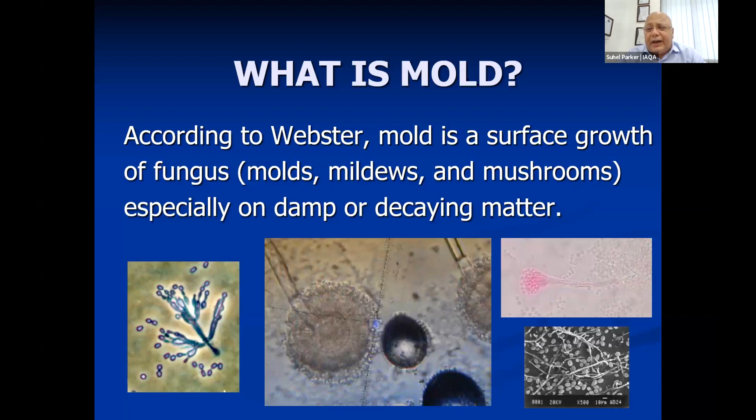Mold is nothing but fungus, and mushrooms are something like mold. It is a mold. And when you see buildings, you see those black and green growths in wall corners, on grills. That is all mold. And they do have consequences. A lot of times they're visible to us, but we are so used to it, we don't react, don't take action. The most common types of fungi are generally not hazardous, and they're not hazardous to everybody. But a good percentage of people do get affected.

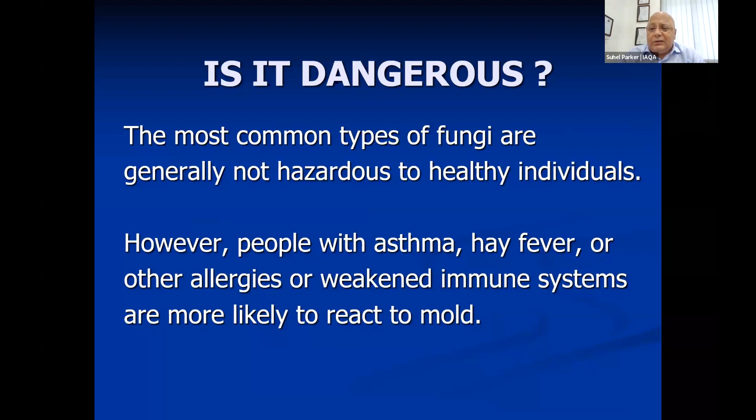A lot of people have asthma, hay fever. You might have noticed a lot of people, when they enter an air-conditioned building or an office, their eyes immediately start watering, they start sneezing, sniffing, and the guy next to him is fine. Some are more susceptible than others, but it does affect a lot of people. You must have seen this scenario in many offices. One person is sitting with a sweater and sniffing all the time, the other sitting comfortably in the same environment. The most common symptoms are running nose, eye irritation, coughing, congestion, and it aggravates the symptoms of people who have asthma.

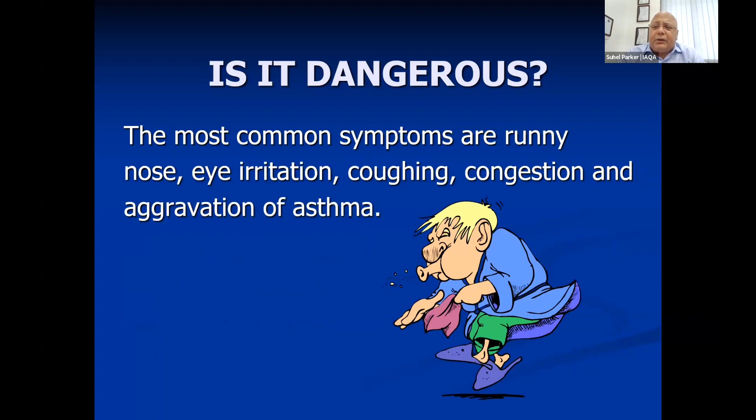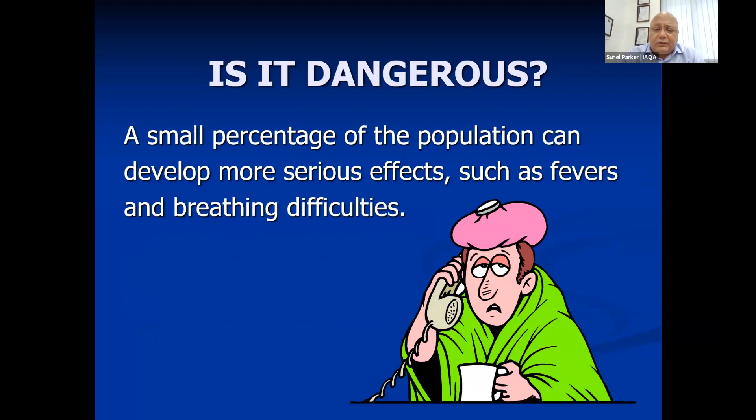A good percentage of Indians today have asthma. So you're talking about a good percentage of the population in a building. And if it's not affecting you today, it might tomorrow. So you need to take note. A small percent of the population can develop more serious effects, such as fever and breathing difficulties. Even though mold affects people differently, as I said earlier, it's not affecting all, but it will. Even where your symptoms are not so prominent, the system is fighting it, but it's there.

But is mold necessary? You've got to understand, in the earth environment, mold helps break down and decompose materials. We always talk about materials being decomposable, and mold is a necessity. You can't say there'll be zero mold anywhere, but it does affect us when, in an indoor environment, it's in a high concentration, and a lot of people get affected. So we always talk about controlling mold, not eliminating it. If there was no mold, there would be no life on Earth. Life would have ended a long time ago. It's a cycle of things. Things are born, they decompose, and they are reborn, and mold really plays a big part in that.

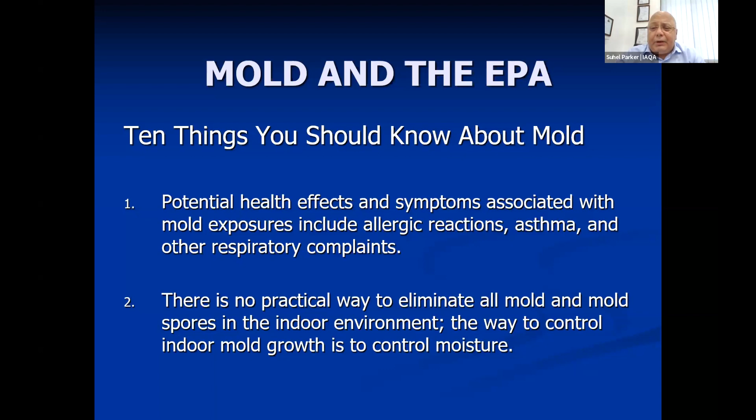What are the potential health effects? Well, you can have allergies, reactions, asthma. People have a lot of problems. And if you talk to a pulmonary doctor, there are other respiratory issues and complaints that come through mold, especially with younger children below 5 and senior people, especially in homes. It's a big issue. Practical ways to control or reduce these spores, which are prominent in the air and help in spreading mold, is by controlling moisture. And we just heard Nitin talking about the moisture being maintained in his hotel room at 80%.

10 things you need to know about mold. If mold is a problem in your home or school, clean up the mold. First thing, if you see it visually, get it cleaned. Use a sanitizer or disinfectant to clean that wall surface. Second thing, you have to eliminate the source of the problem. Generally, the source is condensation or water leakage taking place in that environment. Find the source and you can fix the problem.

Reduce humidity. As we spoke, it should be 30 to 60%. I was in one of the most premium houses in India, and the humidity there was 80% with the temperature at 20 degrees. This means there's definitely going to be condensation. And condensation means you're going to have moisture and growth of mold.

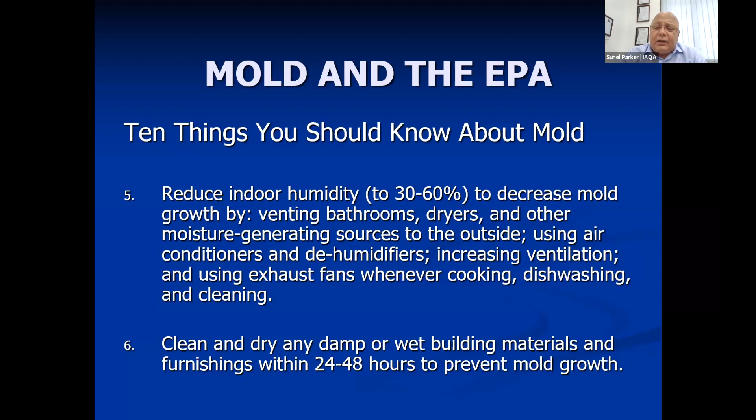All damp areas, wet building areas, even furnishings which are wet; mold grows on wood, grows on more surfaces. So you need to keep surfaces dry. That means if you see condensation happening, take action immediately. Then you can clean hard surfaces. There are various materials available to clean and absorbent materials to dry surfaces. We should get them, put them into action, prevent condensation.

If you go to hotels, quite often you have those sliding doors, and if you see a vent right across, you'll see a lot of mold growth because hot air is hitting that vent, which is generating cold air, and you'll see definite mold signs, black dots on the place. It's visual. You can see it visually. We take air samples on an agar plate to see how many mold samples are there, how many colony forming units are there. But in most cases, you don't even need to do that. Whenever I walk into a mill, I can see it visually, and we choose to ignore it.

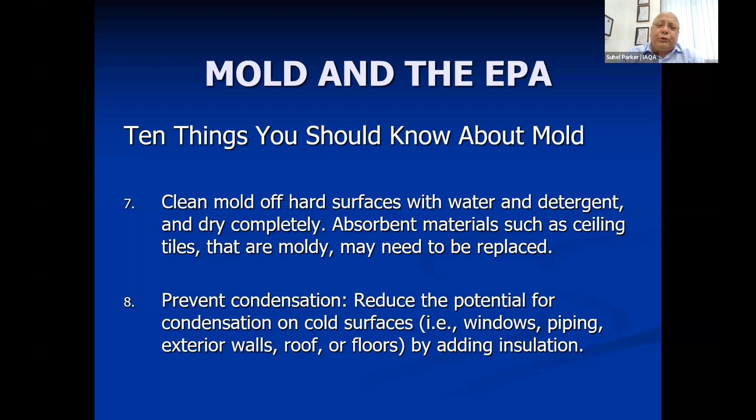10 things you should. Then we have carpets. If you have a very humid, moist area, avoid carpets. Carpets hold moisture. Hard floors are easier to dry. So in a city like Mumbai or Goa, carpets can definitely be avoided. And mold is such a fast growing, they grow in hours. They can grow on wood, paper, carpets,

specifically when you have flooding taking place, which is a major problem. So say if your bathroom overflowed, or if you had a fire and the fire department has sprayed water into your building, drying the building becomes a major issue because as the room dries, the walls start releasing more and more water. The moisture is absorbed in your building structure. So that leads to a lot of mold growth. And once that happens, getting mold out of a building which is already wet is one of the most difficult challenges.

Where did it come from? What does mold need to grow? As you said, moisture, temperature. Temperature, you're talking about ideal comfort temperature you need to grow a mushroom, say around 18 to 24 degrees. And that's what we have in our indoor environment. So the temperature is anyway ideal. We maintain that, but we can control the moisture and its source.

Food source. What is a food source? Food source is all the particulate matter, dust, little debris which generates within a building and which has landed up in the ducts and other locations; they form the food source for mold growth. So you cut the food source, control the moisture, you can control the mold. Once you know that's a life cycle, instead of using a lot of chemicals to just reduce its content for a short while, you've got to attack it at the source. Stop the life cycle of growth and control it.

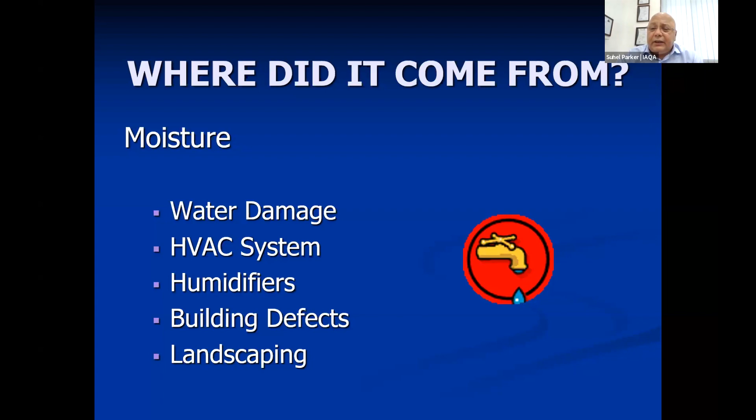There are building defects, pipe leakages in old buildings. Intake is next to a fountain. Blocked vents. Very often, when you block vents, you tend to create condensation. I've seen people feeling cold and putting a piece of paper or plastic and blocking a vent. Faulty mechanical equipment. If your coils are clogged and your drip trays are full, the capacity of the coil to remove moisture from the system is a problem. So your equipment, lack of cooling system.

Generally, an air conditioning system does reduce humidity. And if that cooling system is not functioning properly, it lets a lot of moisture come into the buildings. And the contaminated coils are those. In fact, when you talk about coils and filters, if you maintain them clean, you not only get benefits of low moisture and controlled mold growth, but you will get energy efficiency also. I've been told just by this, you can get better efficiency by 15%.

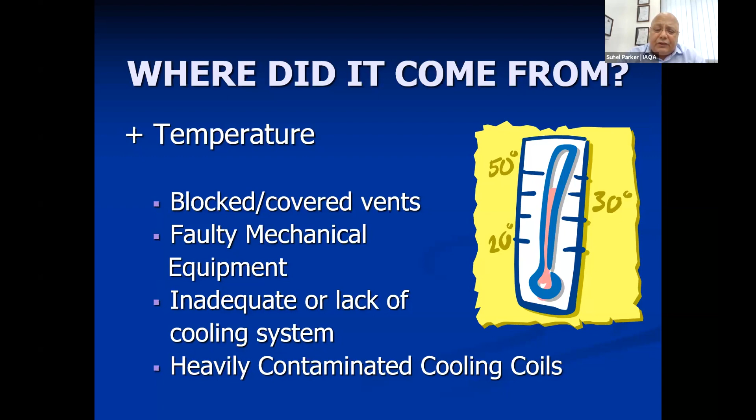Food source: all your drywalls, ceiling tiles, building materials, dust, dirt, debris. If you can control these elements coming into your building. One very common way dust and dirt comes in is through the shoes when people enter an air conditioned building. A common practice: if you just put about 10 meters of carpet before entering a building, it will catch most of the dirt and dust from your shoes.

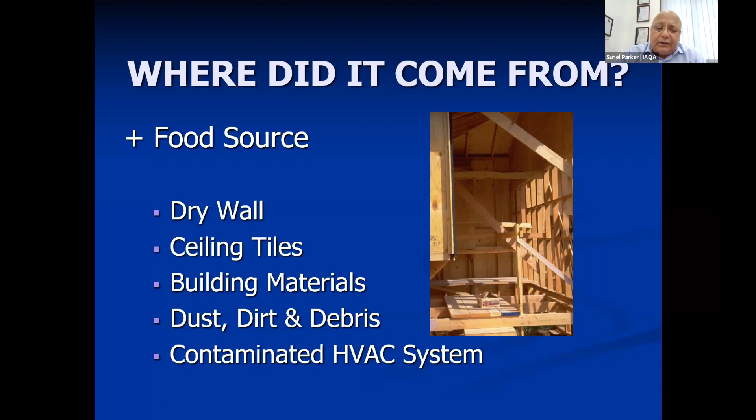These are small things which are very practical that can be done. Then there are double door systems which you can have. Then a lot of renovation takes place in buildings on and off, and that happens with the air conditioning system on. Where do you think all the dirt and debris is going? It is going into your HVAC system and all over the building. And generally, when you're cleaning, your vacuum cleaner is throwing the finer particles up into the air again. And that's why you get a higher PM1 and PM2.5, which Nitin was talking about.

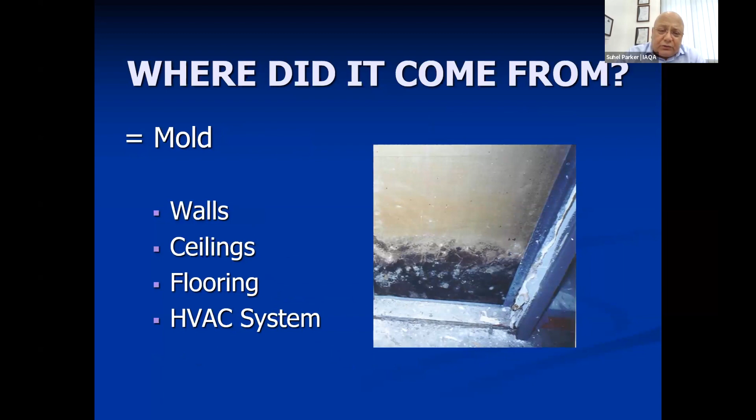This is a typical picture. You must have seen this scenario in many places, especially in the monsoon time, in most houses and in office buildings, where you find corners which have gone black and green like this on ceilings. They should be looked at immediately. It's not practical to remove all of it, but controlling it is important. The key word is controlled moisture. To have moisture control and monitoring humidity in the office is a step ahead.

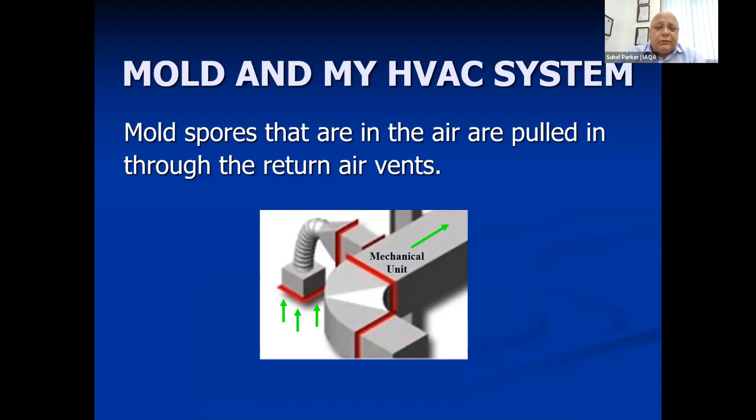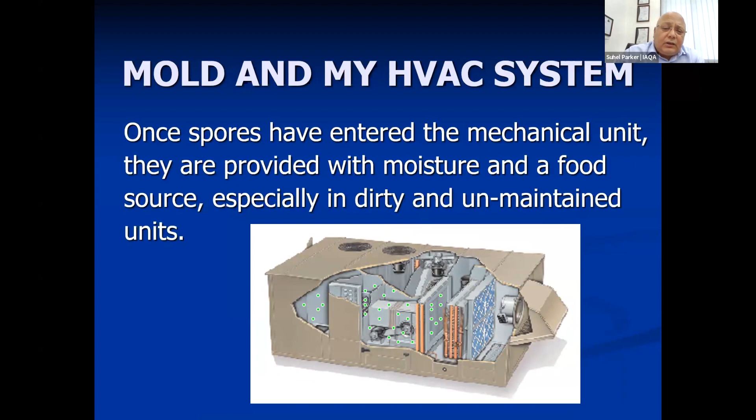Now, the air conditioning system performs a magnifying effect in the lungs of the building. It takes its spores and spreads it right across the building, and so the growth multiplies. It's like the seed for more growth. So one infected area can contaminate the entire building through the HVAC system. Mold spores that are in the air are pulled in through the return, through our coils, through our filters, where they multiply further. As I said, they grow in hours, and they are spread right across. There's a lot of food source. Dirty ducts have the food that increases the cycle of growth of multiplication.

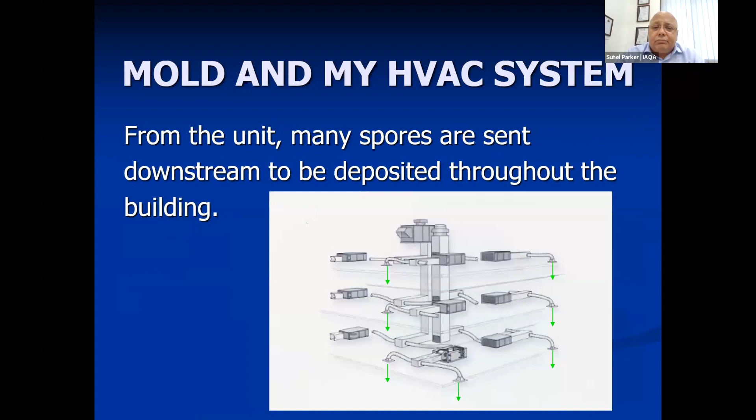Cooling coils, and then it finally gets into the ducts. The spores are spread right across. So when you have a central air conditioning system, you need to understand that it's going to spread all over the place. So wherever there's visible growth around air vents, there's condensation on vents, there's odor.

Now, talking about odor, Nitin was talking about the hotel where they were keeping the temperature at 19. I've gone to hotels and I've insisted and brought the temperature to 25. You know what happens? I get a bad odor. You know why I get the bad odor? Because the entire insulation post the fan coil unit was wet and had thick mold growth. And the mold odor was stronger at 24, 25 degrees, to the extent I don't want to stay in this 5-star hotel room because it's smelling. To avoid that smell, they're spending that money and running at 19 degrees. And this I've seen in the best chain of hotels in the country.

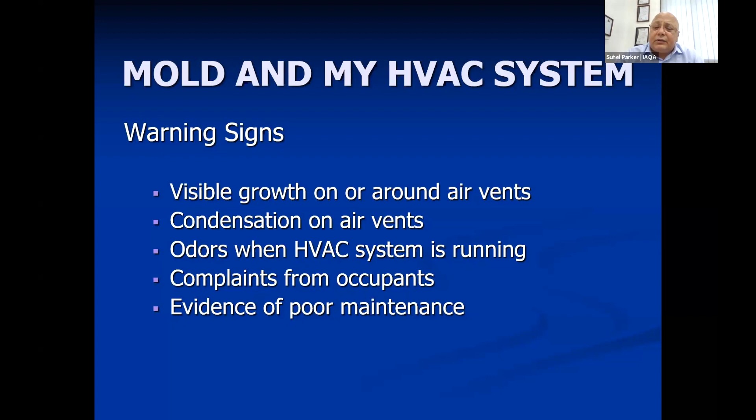What happens? The condensation on the insulation which is there, totally wet, and growth takes place. And that's clear evidence of poor maintenance. Anyway, you don't need to panic. This is happening all over us. We've got mold all over the place. All you need is to have the knowledge, locate the source, communicate your actions, and document it. Document it why? If it's happened today, it will happen tomorrow again. So there was a way we had fixed it, and we should have a look into it.

You can always speak to HVAC engineers, call professionals who are experts in the field, because once the growth starts, it continues, and it comes to a state where your building starts smelling over a long period of time. When mold infestation is very heavy, if you see a lot of old heritage hotels, they smell. It's a very difficult task if you've not watched it and let it go. Understand one thing: with us as the HVAC industry, they blame the air conditioning system. It's the building that is contaminating the air conditioning system. We can very easily disinfect and clean the HVAC system, but it is getting contaminated by the building.

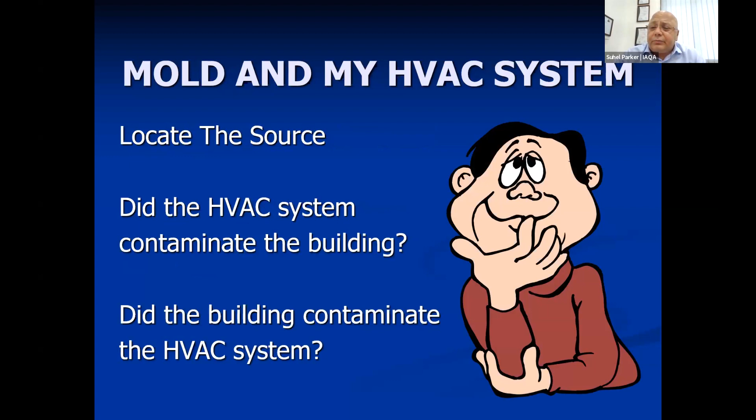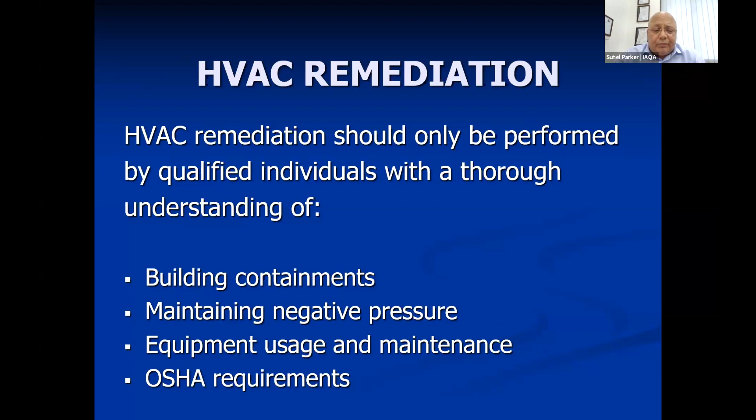You need to find out other sources from where the moisture and food source is coming, not just the air conditioning system. We can concentrate on building containments. When you're cleaning, you have to maintain negative pressure, because when we clean and agitate, we cannot allow the spores to spread to other areas. So generally, a negative pressure machine is used with a HEPA filtration system that can capture these spores when maintenance is being done. This is as per the OSHA requirements.

Okay, if you maintain your building and offices, you will have better morale, better productivity, rather than people sneezing and feeling uncomfortable, breathless, and having to go out every 15 minutes for fresh air. They'll have better productivity, it will improve comfort, and there'll be fewer claims. In India, we don't have claims so much, but abroad, it's an issue for insurance claims.